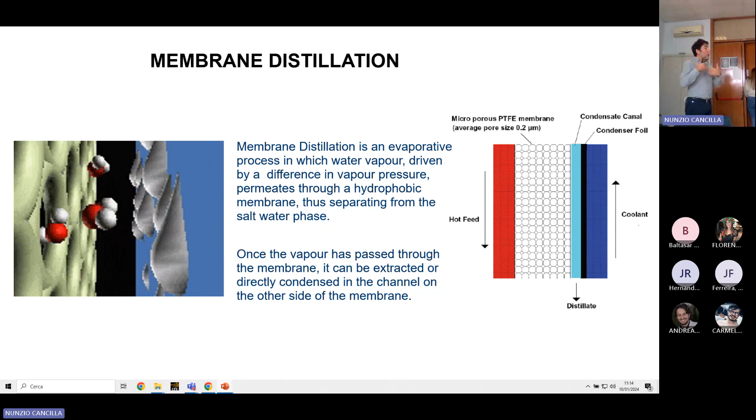If a vapor pressure difference is established between both sides of the membrane, there will be a vapor flux through the membrane, but liquid will be retained. It's very similar to non-permeable transpirable materials, so we have liquid sweat, which comes out as vapor, but rain does not come in. It's a similar principle.

The pore size does not need to be as small as in reverse osmosis membranes because it's not doing the selection. Selection is done by the hydrophobicity of the pores. So as long as the pore can keep this liquid meniscus, this interface between liquid and vapor, we are fine.

There is therefore a pore size determined by the liquid entry pressure, which is related to the properties of the liquid, the material of the membrane, the size of the pore, and the hydraulic pressure. But the hydraulic pressure typically is low, so as long as we don't exceed a hydraulic pressure of about 3 to 4, we are fine, and we can have pores that are in the micron size.

How to condensate? We have the vapor coming through the membrane, not the liquid, but then we need to condense the vapor. How do we do it? There are different configurations of membrane distillation to achieve that condensation.

The most straightforward one is using a cold permeate in contact with the membrane, so the vapor condenses directly in a cold permeate. This has the problem that there are conductive losses because there is a cold fluid in contact with the membrane. We can separate this condensation surface by including an additional layer here.

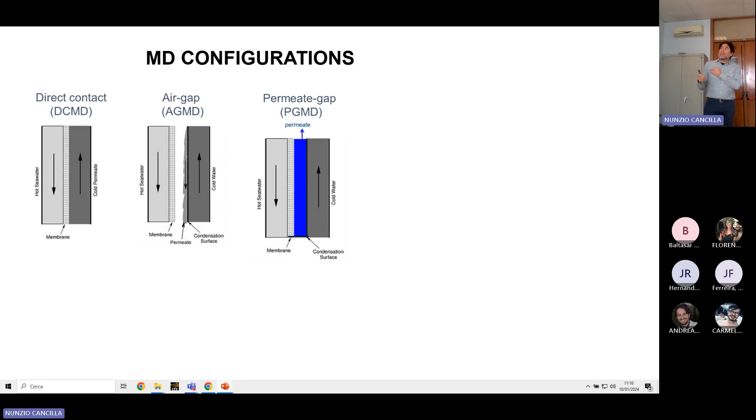So this is liquid, but it's stagnant, it's not moving. There are not as many heat losses as in the previous case, and there is no mass transfer resistance. But we can also extract the air from the gap.

Sucking the air out with a Venturi effect, that is the so-called vacuum-enhanced air gap membrane distillation configuration, which is the most efficient. An additional strategy is to extract the vapor from the module and condense it outside, either using a sweeping gas.

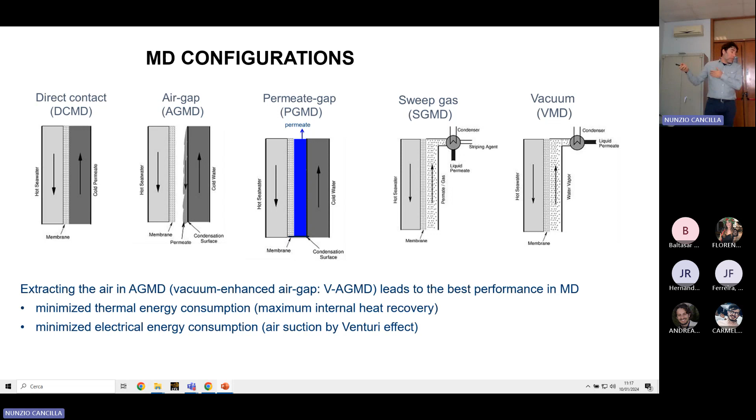Then we need a sweeping agent to separate the gas from the vapor, or use a vacuum pump that sucks the vapor out to an external condenser. But then you need the electricity consumption of the vacuum pump.

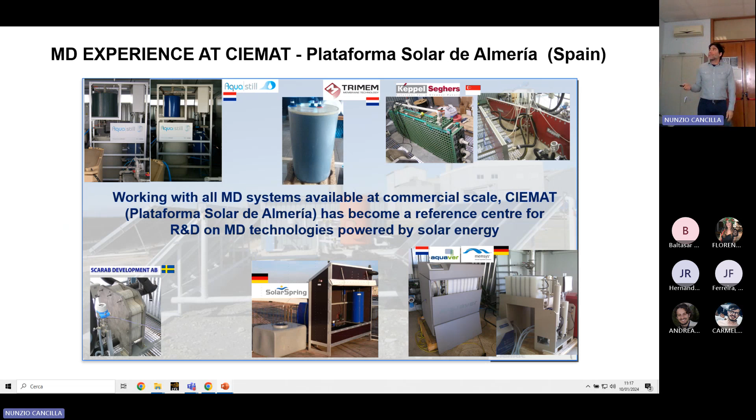At PSA, Plataforma Solar de Almería, we have experience with practically all available commercial modules using flat sheet membranes. The most important thing when we evaluate membrane distillation is the energy consumption.

And that's related to heat recovery, because you need a lot of heat to evaporate. But then there is a lot of heat released in the condensation process. So the key thing is to recover that energy.

The typical way to do it is, as mentioned before, using the feed as a condenser, and then the feed is preheated by the latent heat of condensation. So the latent heat of condensation is turned into sensible heat, as in multi-stage flash technology.

So an example here: we have the feed originally at 20 degrees, then it can be preheated up to 50. We only need to raise it up to 80 degrees, which is the maximum operating temperature of membrane distillation.

If we have a very long module, then we can have much more preheating. We need much less external energy. We only need to go from 75 to 80 degrees. But then we produce much less because the driving force is reduced.

Whereas in this example, we have 30 degrees difference driving force. Since the module is long, we cannot consider the driving force as 80 minus 60. In reality, it's 80 minus 50, or 50 minus 20. In this case, it's only 5 degrees driving force, so the production is less. So there is a trade-off between energy efficiency and flux.

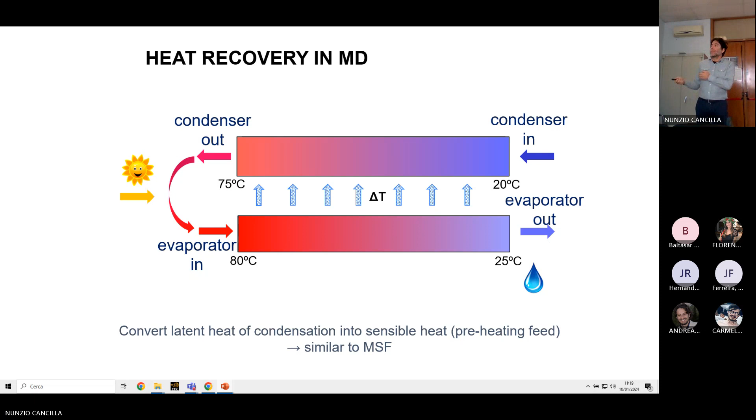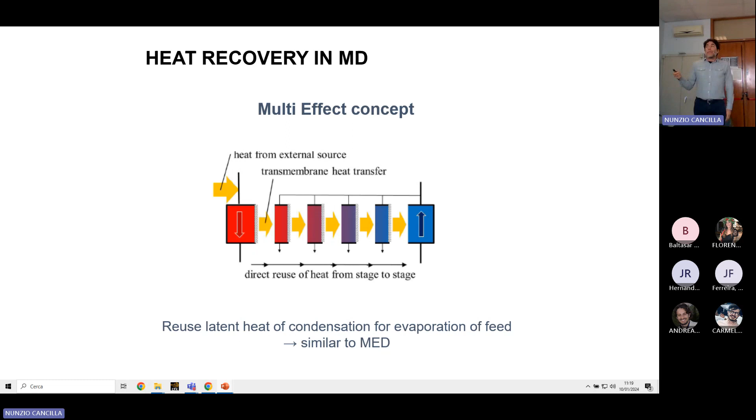This internal heat recovery can be done externally by coupling modules in series, but it's the same principle. To avoid this trade-off, we can recover the latent heat of condensation as latent heat of evaporation, as done in multi-effect distillation technologies. So we have several stages. The condensation, this vapor goes through the membrane, condenses here, and passes the heat directly to the feed for evaporation. So it's a multi-effect system with decreasing levels of temperature and pressure.

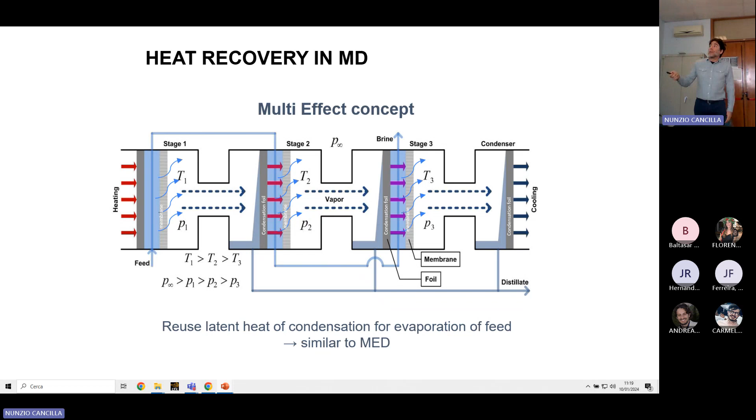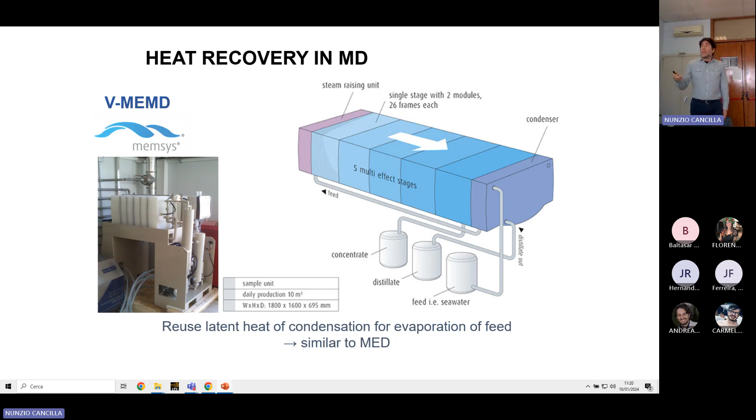This, as I mentioned before, is like multi-effect distillation. This MEMSys technology uses vacuum to move the feed inside, creating what we call the plastic MED systems, which is very equivalent to multi-effect distillation. Instead of having evaporators, you have membranes. Instead of having condensers, you have condensation sheets. It's the same principle, recovering the heat as latent heat of evaporation.

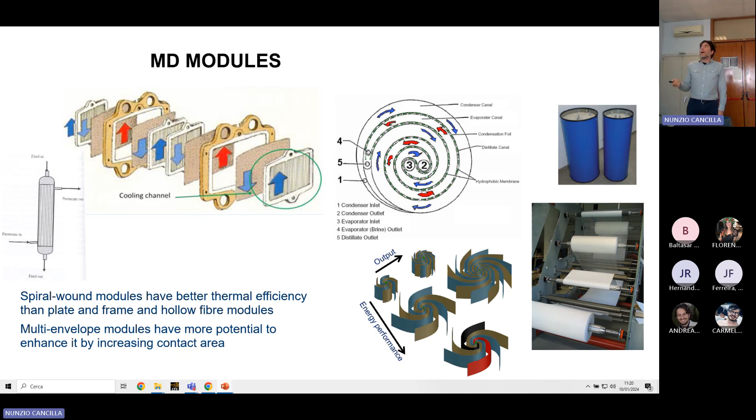Now, membrane distillation modules. This is the summary. Spiral wound modules have better thermal efficiency than plate and frame modules and hollow fiber modules. I will go into details.

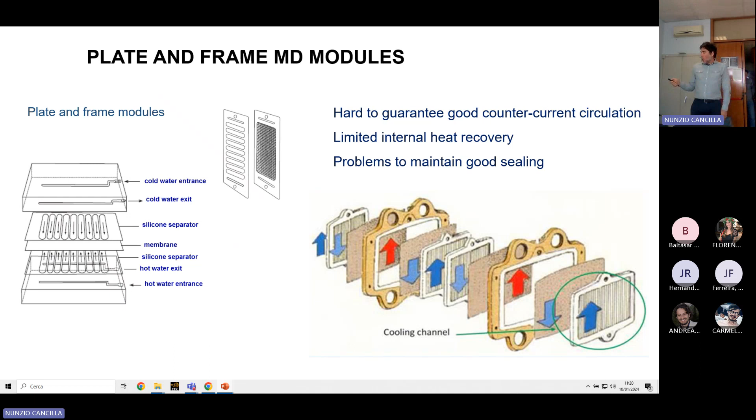We have the plate and frame modules here. You can see that it's hard to guarantee a good countercurrent circulation between the hot side and the cold side, and that limits the internal heat recovery. It's also hard to keep them sealed with this configuration. Whereas in spiral wound, it's much easier to keep a tight module and also to guarantee the countercurrent circulation between the hot and the cold side. So we get much better internal heat recovery.

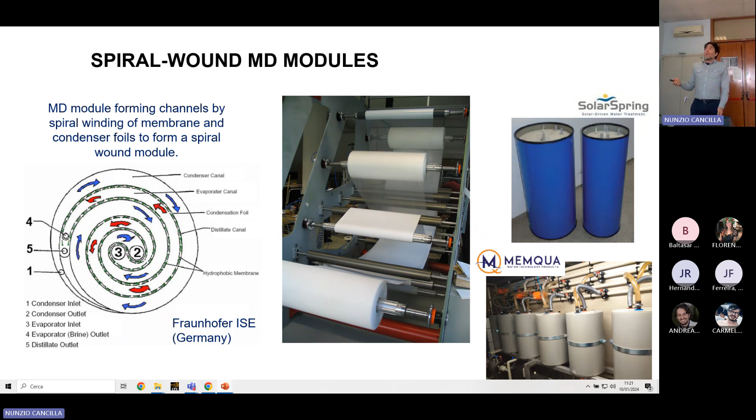So this is commercial modules. Practically all of them nowadays are using spiral wound configuration. But there is a limitation here. If we want to make a large module, then we end up with very long channels. And a 7 meter long channel has very large pressure losses inside, so the hydraulic resistance is large. That limits the size of the modules.

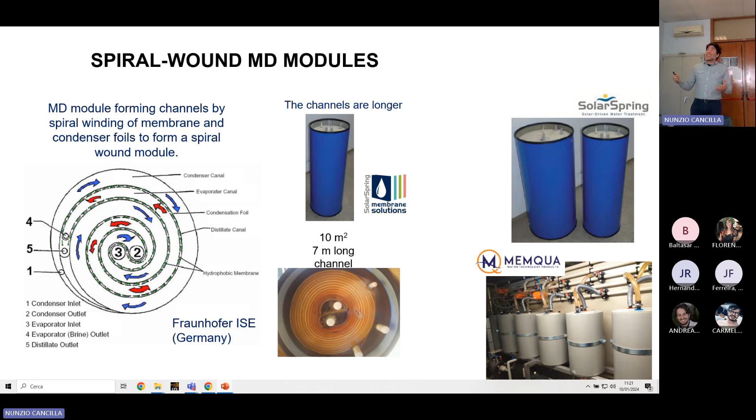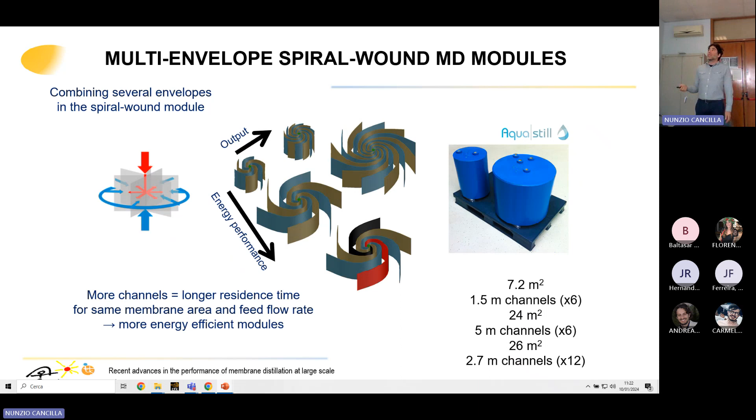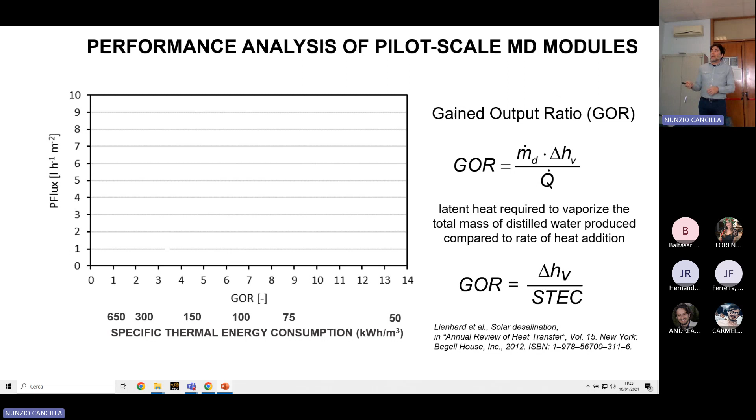The GOR is inversely related to the specific thermal energy consumption, so we can have the GOR shown linearly here, or the specific thermal energy consumption decreased in this way. On this plot, we have the trade-off: systems with large energy efficiency have low flux, systems with high flux have low energy efficiency. This is depicting the trade-off with all the pilot systems that we have evaluated in different configurations.

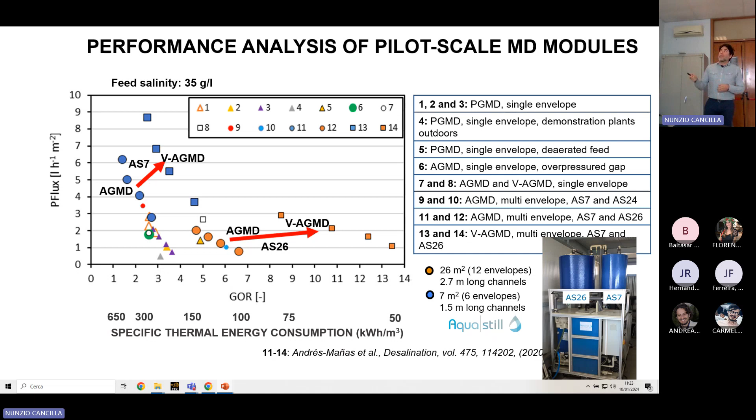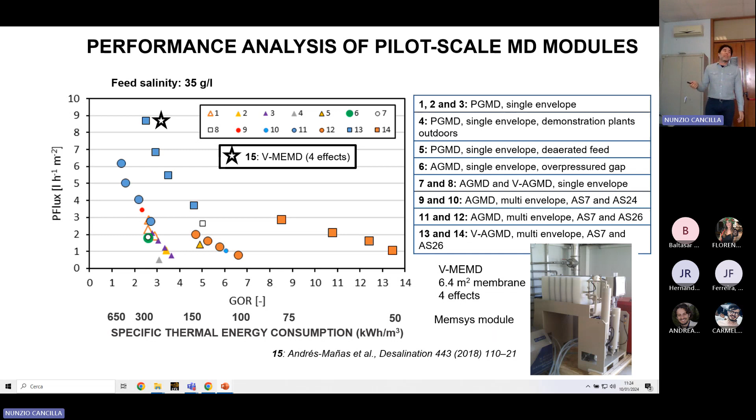If we compare with the vacuum multi-effect membrane distillation with 4 effects, we get large flux because we're using the feed 4 times, but the energy performance, the GOR, is less than 4. With 4 effects, the maximum GOR would be 4. If we want to reach the high GOR of the previous modules, we'd need at least 14 effects, which is hardly practical.

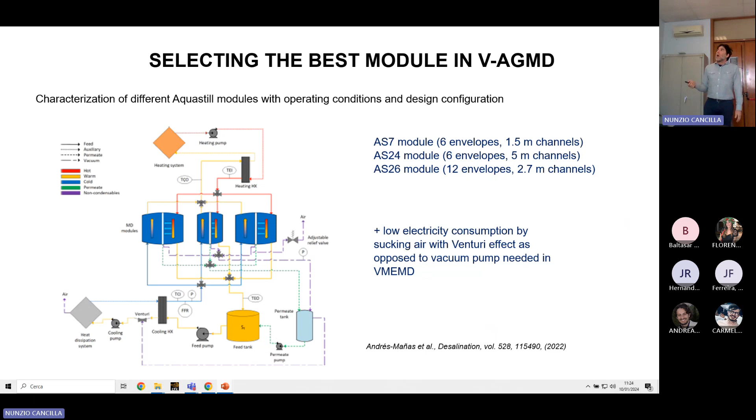So we agree that the best modules are the multi-envelope spiral wound modules operating in vacuum-assisted air gap membrane distillation. We compare the different internal configurations of the modules, and we find that the best one is the one with the largest number of envelopes or channels.

It's the best reported operating performance in membrane distillation for seawater, with a specific thermal energy consumption of 40 kilowatt-hour per cubic meter, equivalent to a GOR larger than 16. The electrical consumption is low because this vacuum is only sucking the air from the gap. We don't need a vacuum pump for that, just a Venturi effect. That's the trick, there is no significant additional electrical consumption.

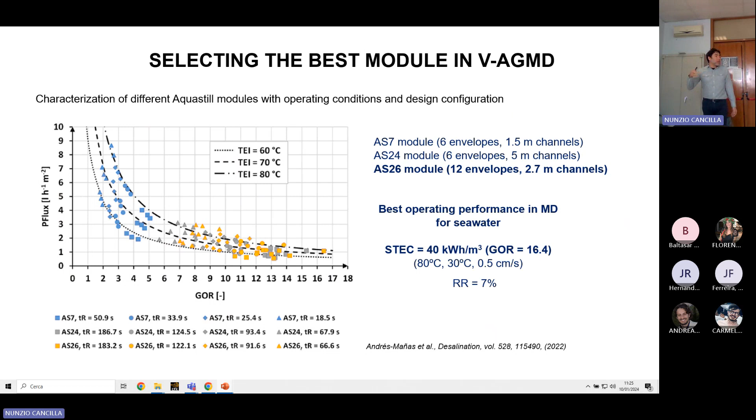And the recovery ratio is low, but if we want to increase it, we can recirculate the feed. An additional advantage of having more channels is the lower pressure drop. Comparing the module with 6 envelopes and the one with 12, you see the pressure drop is half in the 12 envelope module because the channels are shorter, so electrical consumption is lower because there's less hydraulic resistance.

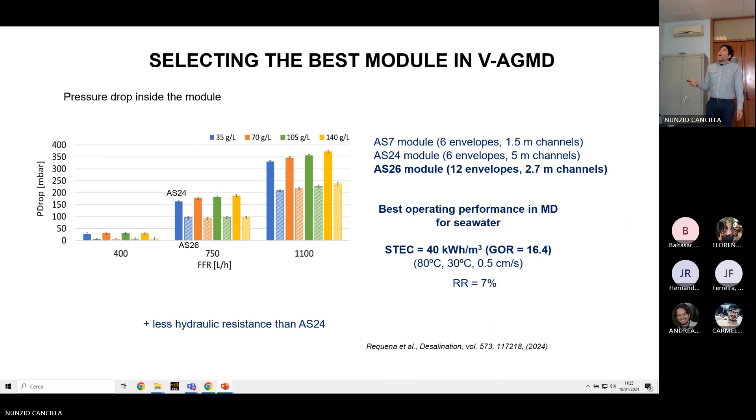So far for seawater desalination. Now, solar thermal membrane distillation for seawater desalination can only compete with PV-RO in off-grid small-scale systems, where you have batteries and so on. The real market opportunity for membrane distillation is to work at high salinity, because it's much less affected than reverse osmosis.

We can see here the maximum feed salinity we can achieve, 246 grams per liter. Of course, there's a decrease in flux because the vapor pressure decreases with salinity, but it's much less influenced than reverse osmosis.

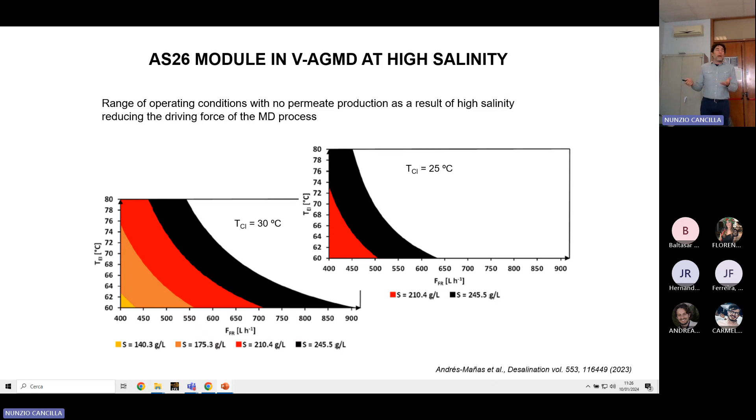We find that there's a range of operating conditions, because of this decrease in vapor pressure, where we cannot operate. We need to increase the feed flow rate and the temperature to operate. But we can still operate with 250 grams per liter feed.

The specific thermal energy consumption also increases with salinity. We can see it here better. This is for 35 grams per liter. As we increase the feed salinity, we move along this curve. This is for 70 grams per liter.

There's an interesting change in the trend, not only the decrease of flux and specific thermal energy consumption. You can see here that the operating conditions that give us the maximum flux are the same that give us the maximum energy efficiency. So there isn't this trade-off of maximum flux versus maximum energy efficiency.

We find there's a change in the optimal feed flow rate, for the same module, just changing the feed flow rate. Low feed flow rate means large residence time, so high energy efficiency. Large feed flow rate means less energy efficiency because there's less residence time. So we can find an optimal feed flow rate.

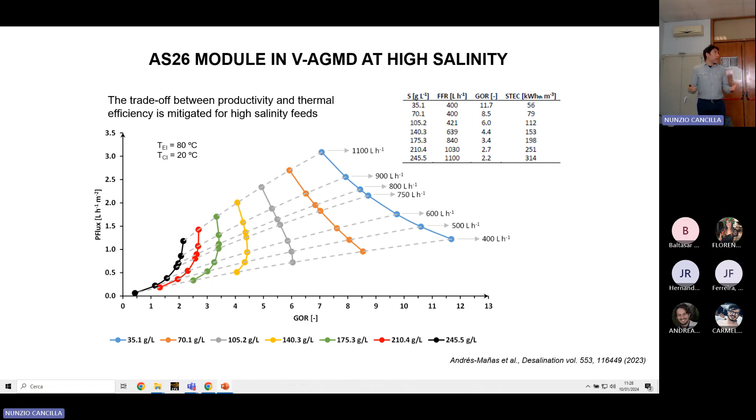This corresponds to the different salinities for minimum specific thermal energy consumption. This is very important because it gives us the operating conditions along the variation in feed salinity that we're going to face when we operate in brine concentration, which, as I said before, is the market niche for membrane distillation. This is what happens with the flux.

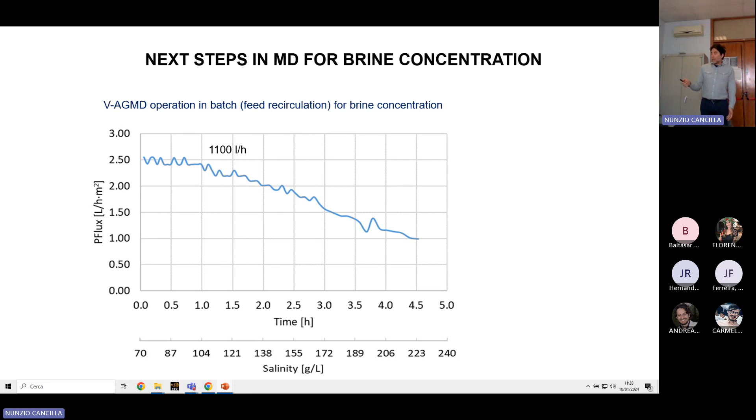As we increase the time, we are recirculating the feed, operating in batch mode. As we recirculate the feed, we decrease the flux as salinity increases. And in relation to that, the specific thermal energy consumption increases.

But we need to look at the integration between these, if we operate for 4.5 hours to reach 223 grams per liter with a feed salinity of 70, then the total specific thermal energy consumption is the integral here. So in 4.5 hours, we can reach 70% recovery from reverse osmosis brine, concentrating up to 223 grams per liter, with a specific thermal energy consumption of about 180 kilowatt-hour per cubic meter.

This kilowatt-hour is thermal energy, not to be confused with electrical energy, which is much higher exergy and much more expensive. This is cheap, low temperature thermal energy.

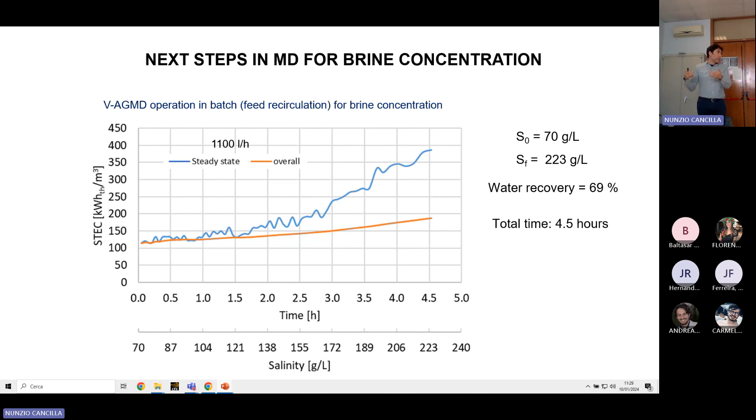This is to illustrate the specific energy consumption of the process. It's less than 0.5 kilowatt hour per cubic meter. For the next steps in brine concentration, we want to demonstrate it in the Sol2 project using real RO brine.

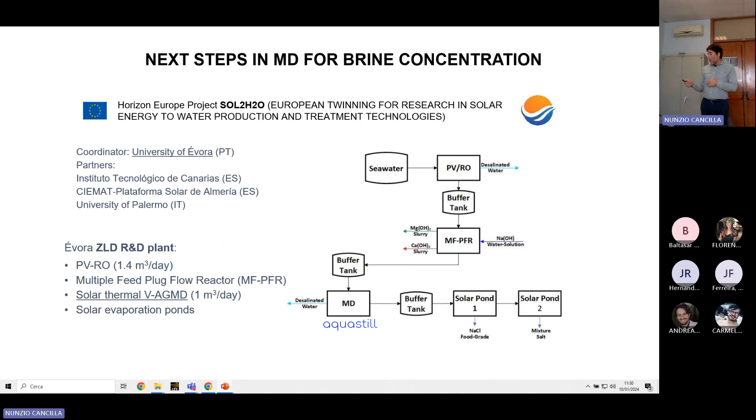This has been introduced before. We also have a project at the University of Évora to do something similar, but without the pre-treatment of the RO brine and at a larger scale.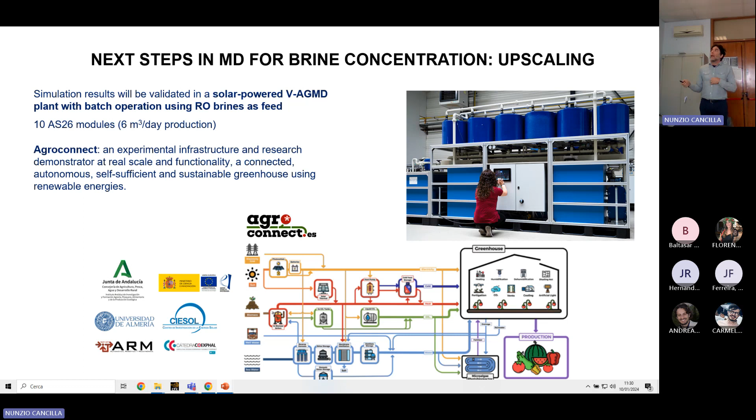And coupling with solar energy - this is another aspect that we're going to demonstrate at Agroconnect. The key thing here is that solar energy is variable, so the feed temperature changes along the day. We need to see how the performance of the system changes with that.

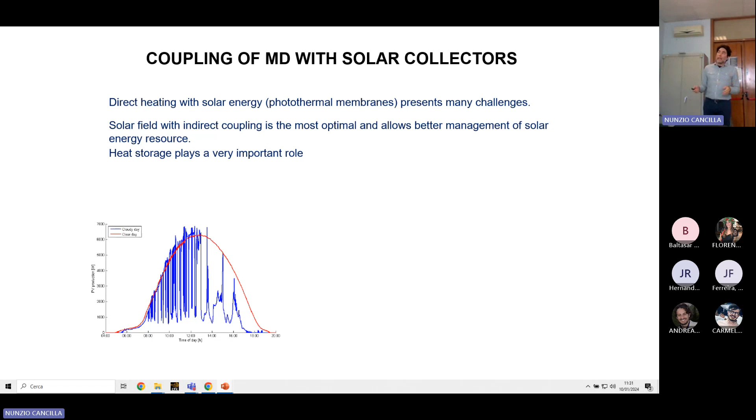When you have this situation, storage is critical, so we use heat storage. This allows us to reach the desired temperature. We can store the excess heat to have a more constant operation along the day at the given temperature. But it's still something we need to consider.

The dimension of the solar field is very important, and the set point. We have an example of a unit of 25.92 square meters, a solar field of 17 kilowatt thermal with a storage of 1.5 cubic meters. To keep a set point of 60 degrees, we have no problem.

If we set the point at 70 degrees, then about 25% of the operating hours we are below 69 degrees - we cannot reach this set point. And if we want to operate at the maximum set point, very hardly can we reach it. Most of the operating hours we are quite below that set point. So that's something we need to consider.

If the unit is more efficient, the solar field is better dimensioned, then we can increase the amount of time that we can operate at the desired set point. But this is something that we need to take into account.

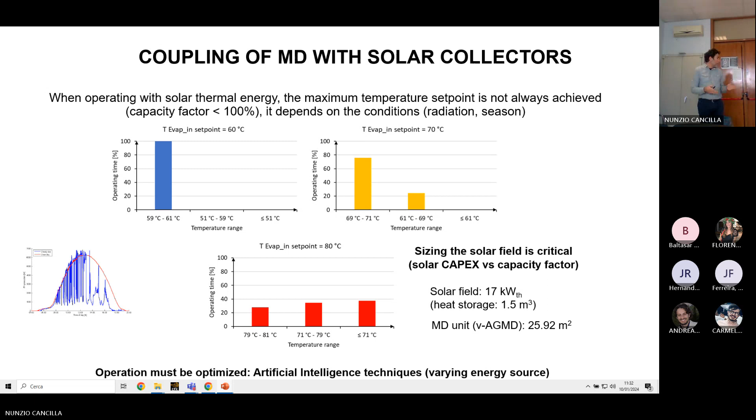Sizing of the solar field is critical because that's where the CapEx goes in the solar collectors, but also changing the operation, changing the temperature of operation to maximize the use of heat. What we need to use in this case is artificial intelligence techniques that adapt to the variability of the energy source.

So to wrap up, this is the state of the art. This is what we want to do. Let's go a bit further than that.

We have operating in brine, in recirculation, in batch mode. The feed enters here, then the brine - the heat preheats it, then it's evaporated. We have the brine, we recirculate the brine, so we need to dissipate the excess heat that the brine might have.

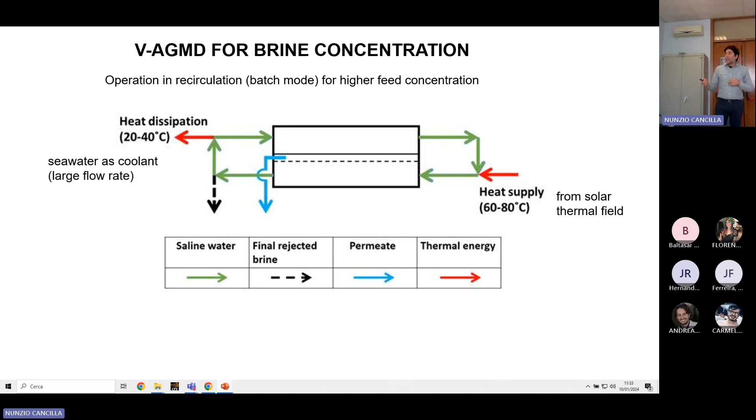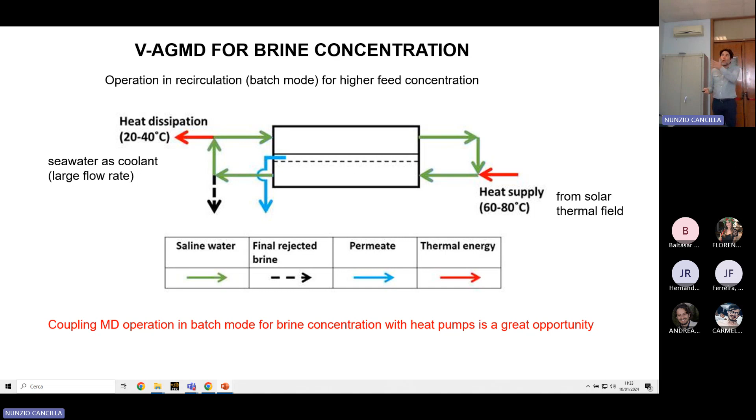We can use the seawater as coolant. With a large feed flow rate, we dissipate that heat. But there is an opportunity to couple this with a heat pump to supply heat and cooling at the same time. That's a very interesting combination at the forefront of the state of the art. We are working on this right now with the University of Southern California.

There is also electrolysis coupled with membrane distillation for green hydrogen generation. If you look at electrolyzers, they have waste heat that needs to be dissipated. The waste heat is at about 80 degrees, which matches perfectly the heat source for membrane distillation. And membrane distillation produces water with very good quality because it's evaporated and condensed, unlike reverse osmosis that has filtered. So we have very low conductivity that fits the electrolyzer.

So we don't need a cooling system in the electrolyzer. Pure water is produced at zero cost using the waste heat. And then we can move this wherever we have salt water - we don't need the availability of fresh water. That's also something being researched nowadays, and this is something that we are doing.

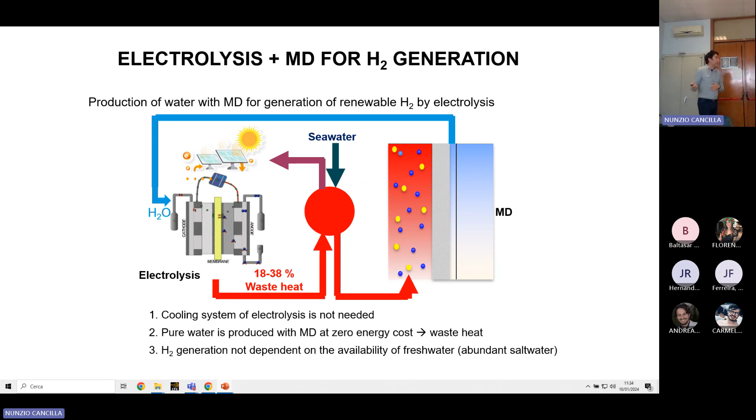Maybe you saw it with the numbers for electricity consumption.

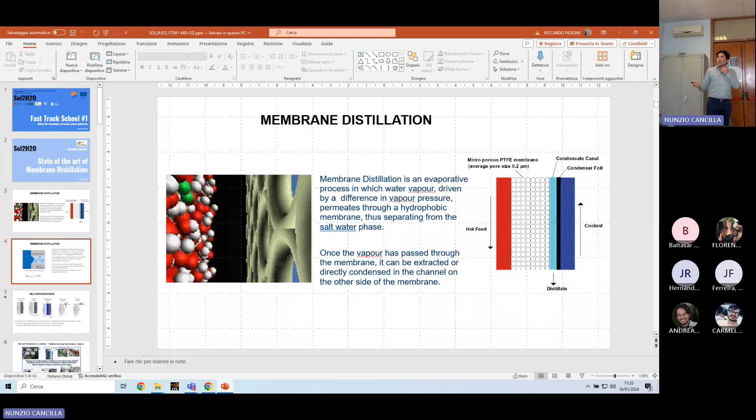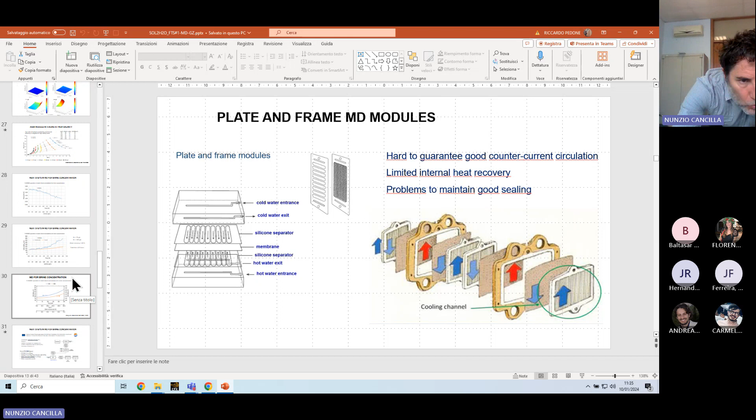You need to operate the module beyond the thermal energy requirement, also the electrical consumption - as a specific electrical consumption. Keep in mind that it's just a pump circulating the water through the module. The vacuum is not really vacuum, it's sucking with a Venturi effect. There's an additional hydraulic resistance, but not much, so it's really a minor contribution.